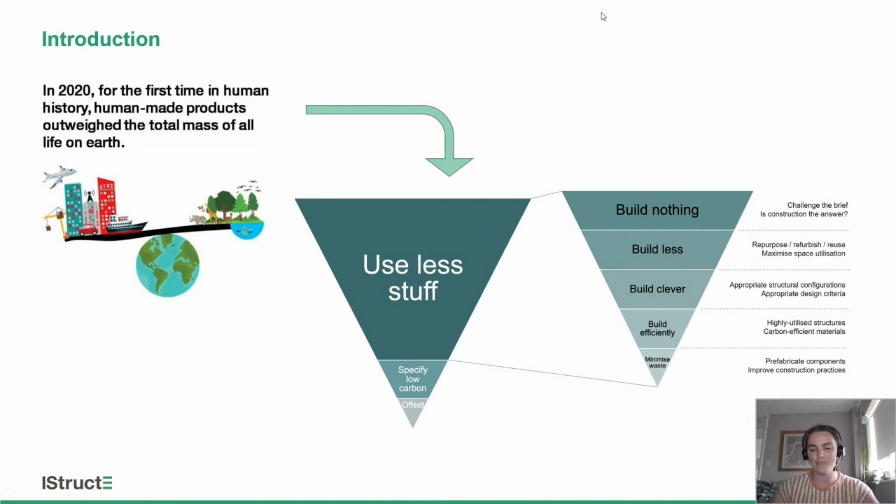Obviously, these triangles have been done to death so far over the presentations before us, which is great because it lets us move into the case studies quite quickly.

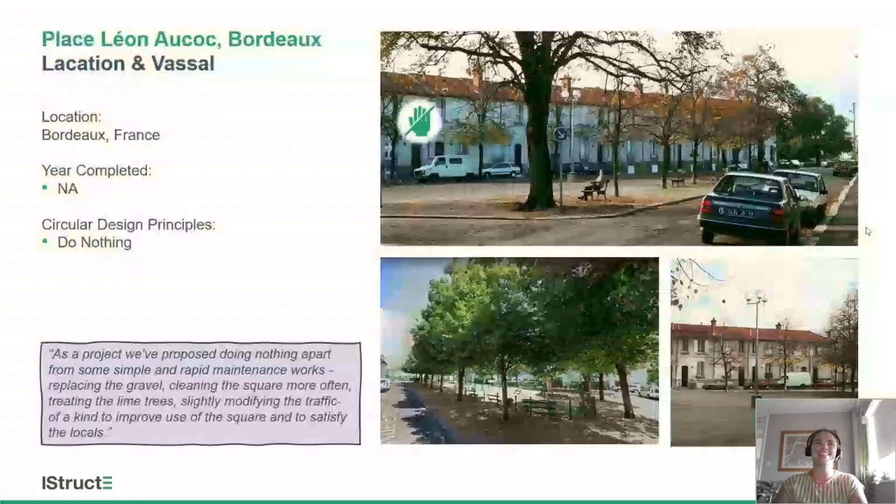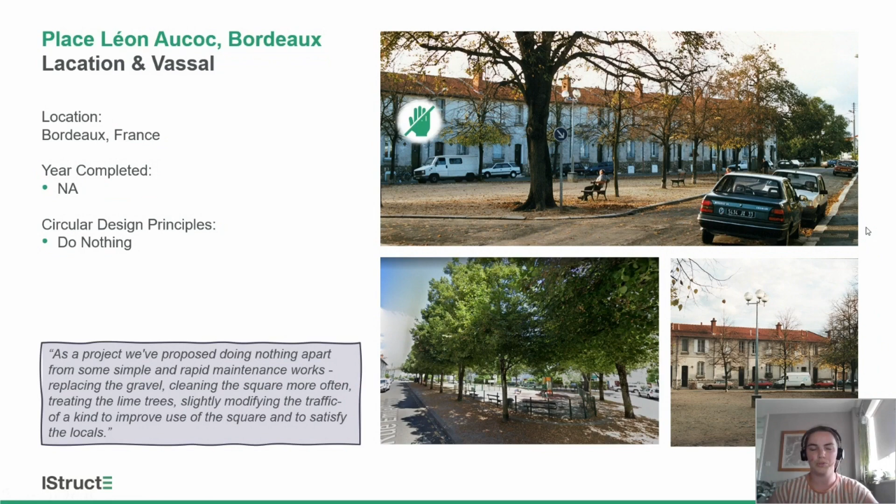No small task. And I thought I'd start with the very top of the pyramid: do nothing. Some of you might have heard of Lacaton Vassal, who won a very prestigious architectural prize recently because their principles as a practice are to do as little as possible. In this particular case, they did nothing. They were employed by the client to establish how to rejuvenate, change, or update this residential square in Bordeaux, France. They assessed it and said, this square is serving its purpose beautifully, it doesn't need any changes, please just maintain it nicely and you'll be grand. So a great example of questioning the brief and eventually not doing anything.

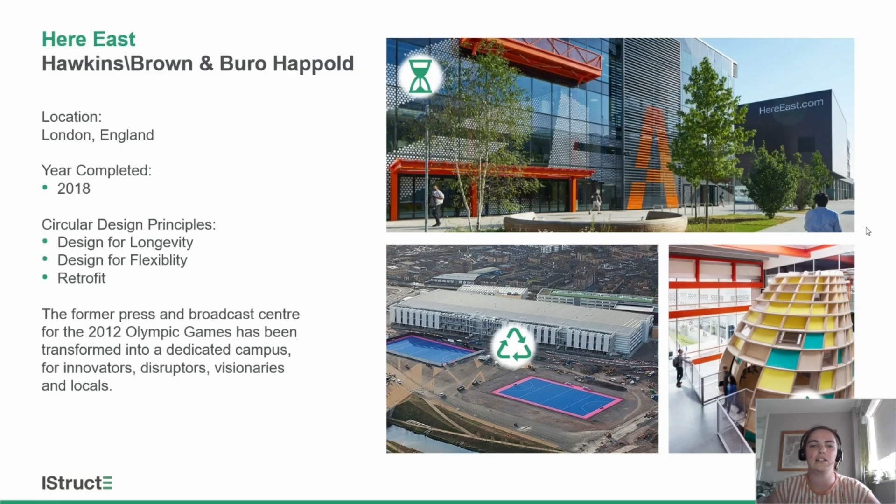Next, we have Here East, which most of you should be aware of from the 2012 Olympic Games held in London. This is one of the buildings constructed at that time to host the Games—you can see on the bottom left the former press and broadcast centre. This was adapted by Buro Happold and Hawkins Brown into a space for local businesses and innovators, designed as a very flexible, adaptable, and long-term space. They expect this building to be here as long as possible and to adapt to the needs of the community over time. It's also a retrofit of a building that was constructed, albeit quite a young one.

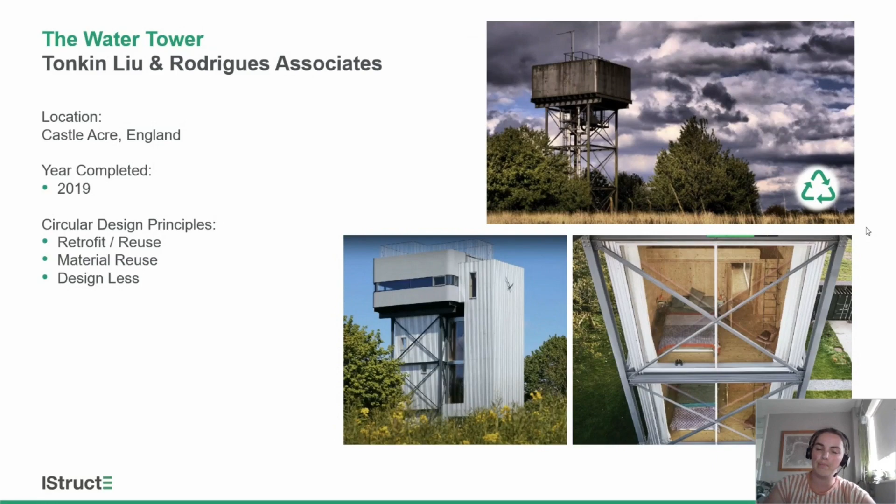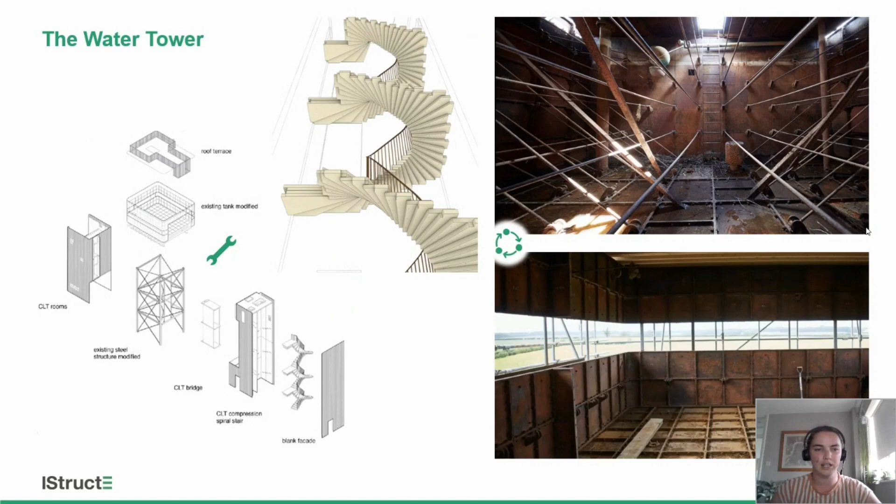Next, we have the Water Tower, a lovely project completed a few years ago in Norfolk. The client purchased the water tower shown in that top photo and converted it into residential use. The engineering and architectural teams did their utmost to use as much of the tower as efficiently as possible, add as little as necessary to convert it into a residential state, and use very low impact materials during construction. There's a cantilever timber staircase, which is very cool. They kept the water tower tank at the top, cut a slit in it, and got the window frames to act as moment frames to keep the shape stable, essentially trying to design all the elements as efficiently as humanly possible.

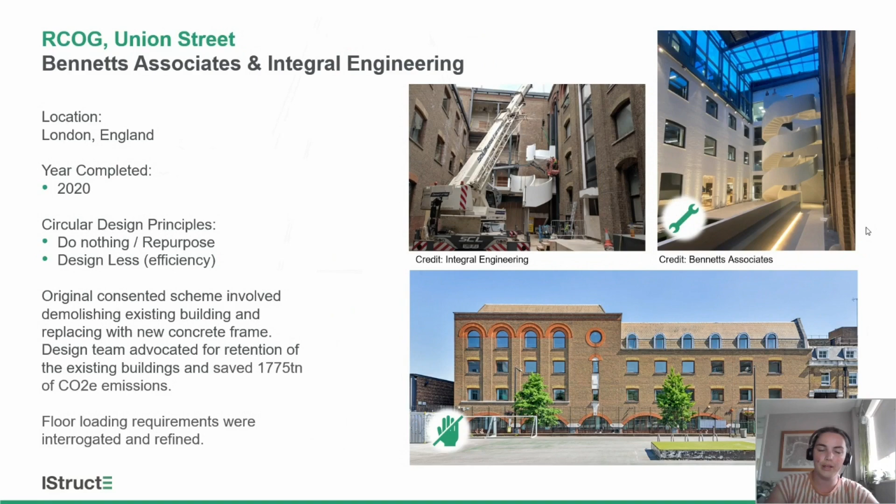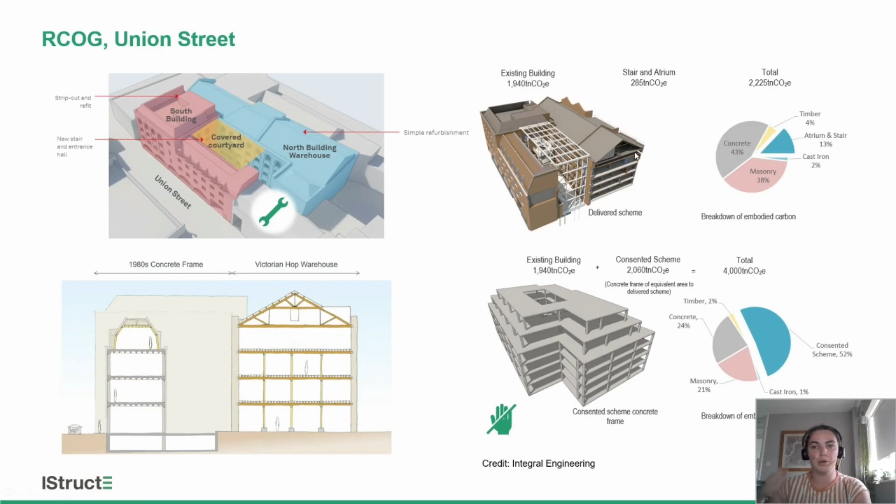And they also questioned the building control requirements for a live load of 5 kilonewtons per meter squared in the top of this building here, which was being converted into a sort of office meeting space. And they managed to get that requirement down to 4 kilonewtons per meter squared based on the fact that for fire escape reasons, you couldn't even put that many people up on that floor.

Next, we have Feldballe School, which is in Denmark. A really lovely project designed to be very flexible and adaptable. It can be deconstructed by hand, so it can be relocated elsewhere if necessary, or just so that elements can be repaired. And then the materials used throughout are sort of wooden cassettes with straw bale, compressed straw insulation.

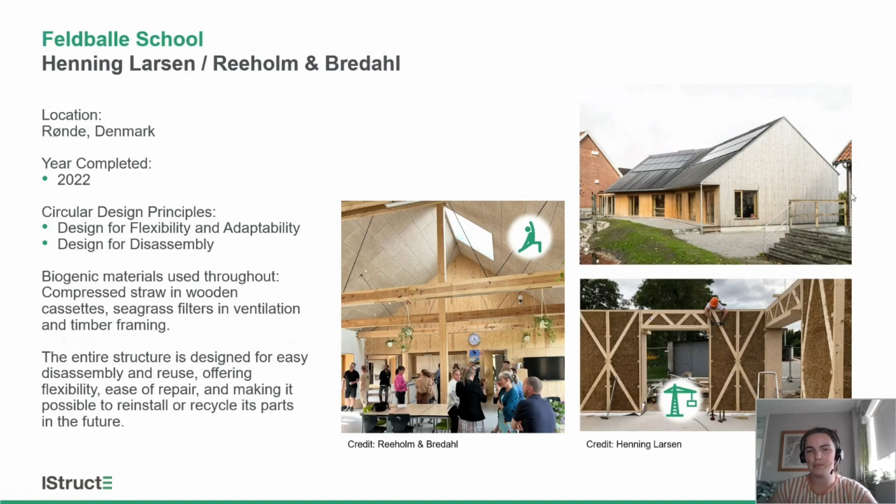They use seagrass in the filters, so the ventilation. And yeah, it's designed essentially for that sort of very flexible space as well, so it can be rearranged and adapted in the future if needed.

This is actually one of Civic Engineers' projects in London, 318 Oxford Street. Some of you might be aware of the sort of House of Fraser. It's a 1920s steel frame building in central London. And this is a great example of the collaboration that we've just been talking about and having these open conversations. So in this project, they're removing the top two floors of the building and building new 3 stories up.

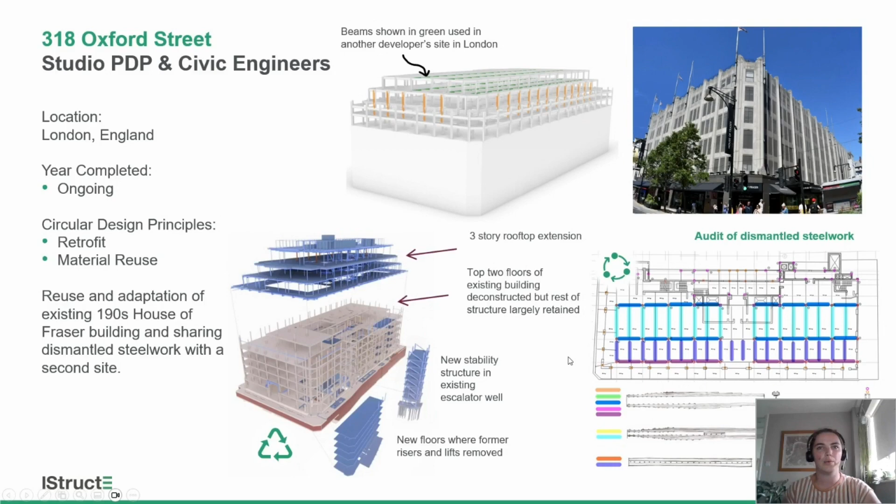And we've audited the steelwork that's in those upper floors that's being demolished, and where we could reuse it within the building ourselves, we have done that a little bit. 2.5 tons are being refabricated and reused in the existing building. But conversations were had with a completely different design team, completely different client on a project elsewhere in London, and 20 tons of steelwork have been bought by that project and relocated across London.

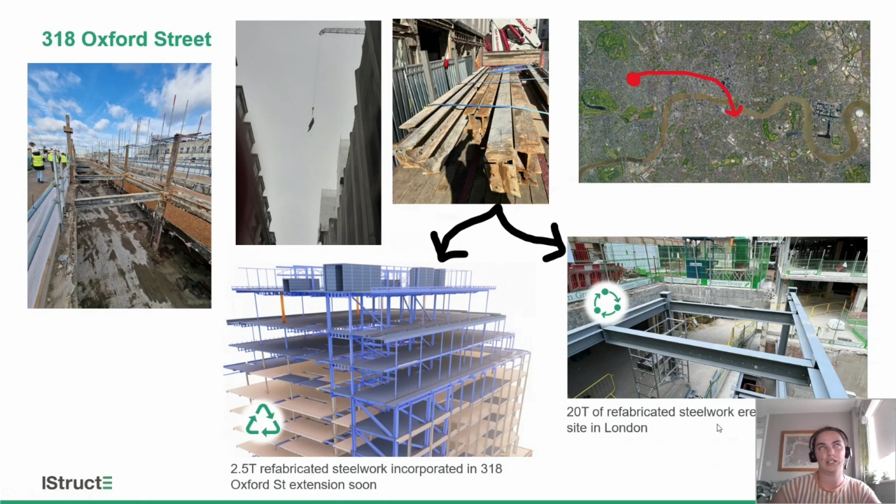And they weren't sent to a stockist and then bought separately by that project. That was had through open collaborative conversations between the clients and the engineers on the project, which is very exciting. It can be done. Also to point out that this is pre-1970s steel, and this was still justifiable.

Next, we have the ABBA Arena, which is in London for now. So some of you might have heard of this arena space, which is hosting the avatars, so a virtual ABBA concert. And this building has been designed to be fully deconstructable, adapts to any future locations where the tour might relocate to, and also designed very efficiently.

So according to Xylotek, who are the timber specialist engineers on the job, they revised the original scheme for the auditorium, increasing the amount of engineered wood and removing about 140 tons of steel, and thereby halving the carbon footprint of the design. So really interrogating what was needed.

Also, it's a really lightweight building. It currently rests on about 300 jack pads. So it's on a car park site, got jack pads on it and then the frame. And when the arena is eventually deconstructed, that car park will remain intact and be able to be reused. And the building could be dismantled and sent somewhere else and re-erected.

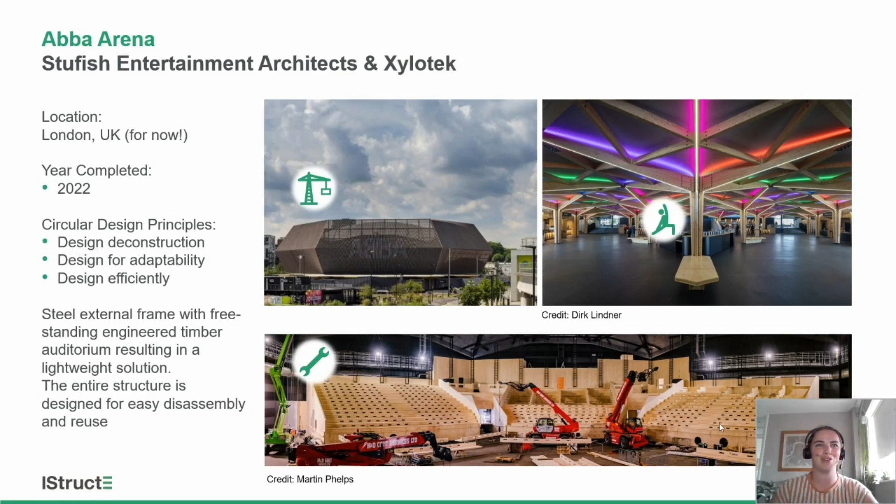And lastly, we have this really wonderful project in Switzerland, the Kopfbauhalle, which was completed a couple of years ago, where they tried to bake in, as proof of concept, as many circular economy principles as possible. So they salvaged most of the new frames. There's an existing building underneath, and then there's a new steel frame above. That new frame, the skeleton, was once a distribution center somewhere else in Switzerland for a shop, and that's been dismantled and brought to site and reused here and adapted.

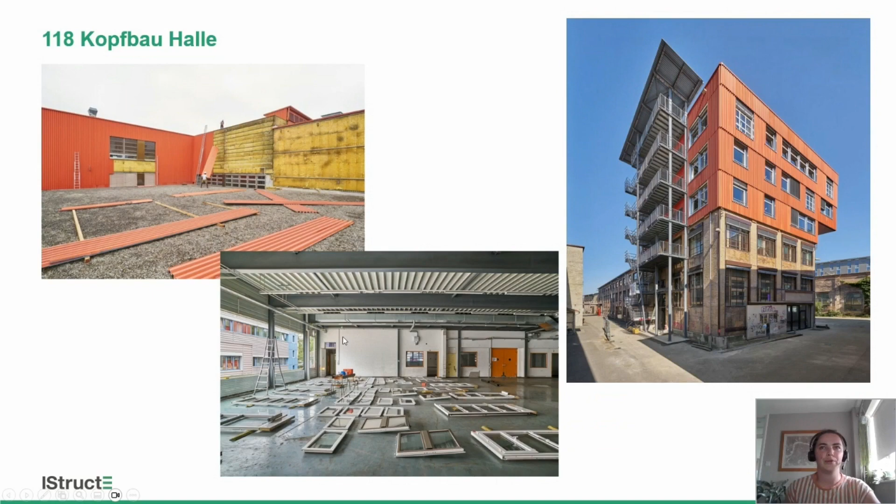There's also a staircase, which you can see in this photo over here, which was again taken from a different building. Then all the cladding and the windows were salvaged from an office building in Zurich, the Orion building, which was due to be dismantled, and they salvaged all of these items and reused them in their project.

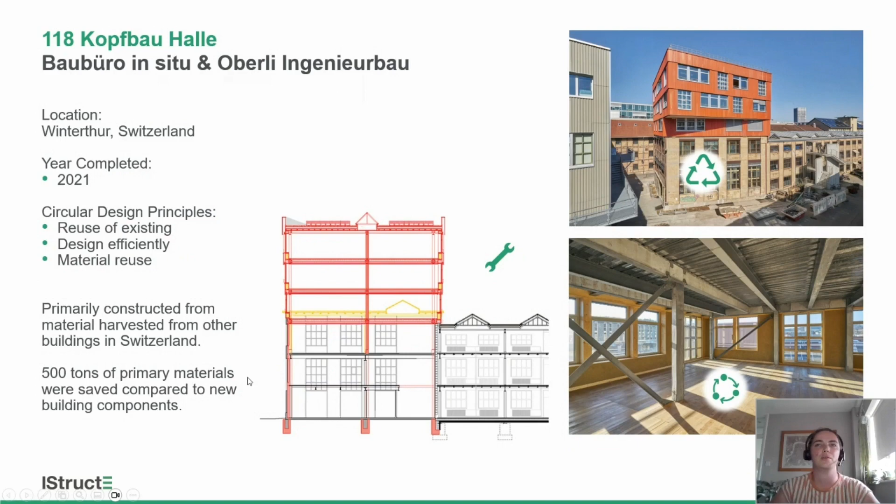And where they couldn't salvage materials and incorporate them, they tried to use as low impact materials as possible. So there's a lot of timber, straw insulation, and lime in the rest of the building. And they claim 500 tons of primary material were saved compared to if this had just been constructed out of new building components.

So I'm now going to hand you over to Sean, who's going to talk about some projects elsewhere in the world. I'm, as Claire said, going to focus on the rest of the world, primarily with a focus on North America, since that's obviously my familiarity, but we'll tour around a little bit. So running through.

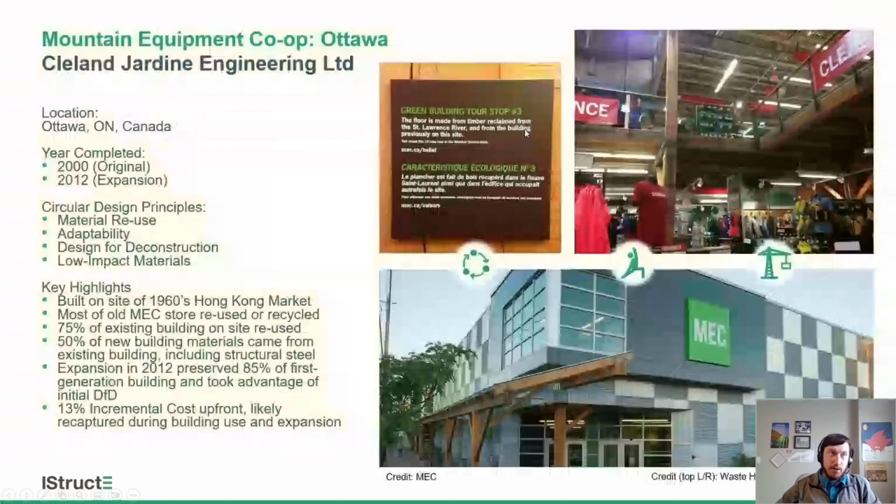So the first one is the MEC store in Ottawa, Canada. MEC is the big outdoor retailer across Canada. And in 2000, they wanted a new store in a different part of town in Ottawa. And there was actually a whole lot of reuse that happened here. There was an existing one-story Asian grocery on the site, and a lot of that got reused.

Actually, a good chunk of the structural steel got reused into the new store that was being built on the site. In addition, the old MEC store in a different part of town was mostly reused in other locations. And then the 2000 building was actually designed for flexibility and adaptability and disassembly. And in 2012, when they wanted to expand, they were actually able to do so and reuse 85% of the building.

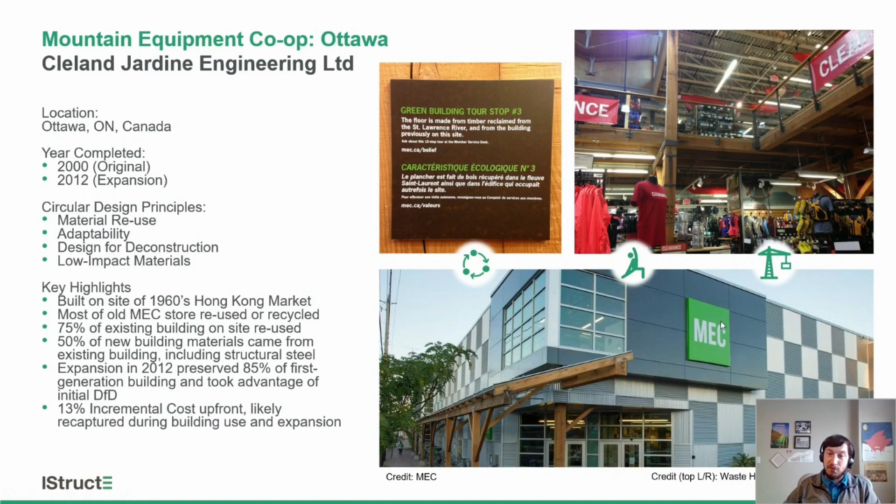There was an estimate here that the initial construction of this cost 13% more than a traditional building, but it was estimated that that was probably quickly recaptured, especially with the expansion having to do very little additional work.

The next one is the Quay Quarter Tower in Sydney. This is one that Arup was involved with. BG&E was the structural engineer, and this was the reuse and expansion of an existing tower. You can see on the upper left what the site was. The tower is in red, and on the right is what it became.

And there's a nice little graphic down there at the bottom indicating the demolition in the red, and then the structure that was maintained, and the expansion in the green, which about doubled the floor area. They were able to maintain about 2/3 of the existing structure and eliminate about 12,000 tons of carbon emissions relative to had this been torn down and built new.

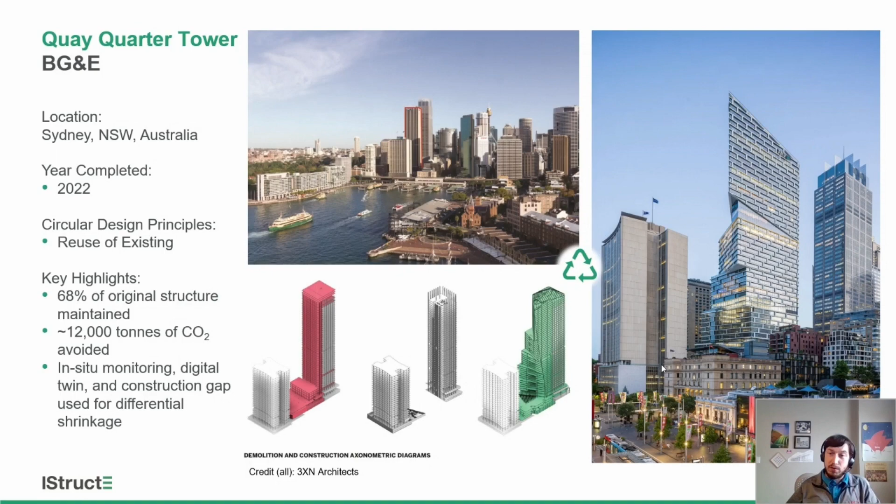And in addition, there was also a lot of technical effort that went into monitoring differential shrinkage when adding the new concrete onto an existing concrete tower. And very quickly, there's a nice time lapse here that is worth seeing of how this all went up. And so you can see the scaffolding and taking down all the structure that couldn't be reused, leaving most of that core intact, and then rebuilding that new floor plate around it. And there we go.

And then moving on next in the Middle East, in Qatar for the World Cup, Stadium 974, which was one of the host venues. This was done by Schlaich Bergermann out of Germany. And they actually designed this to be demountable and able to be reassembled in another location, either in the current iteration of the stadium as it is, or in smaller multiple stadia. And 974 is named for the number of shipping containers that were used, as you can see here, for a lot of the vending modules and stairways and such.

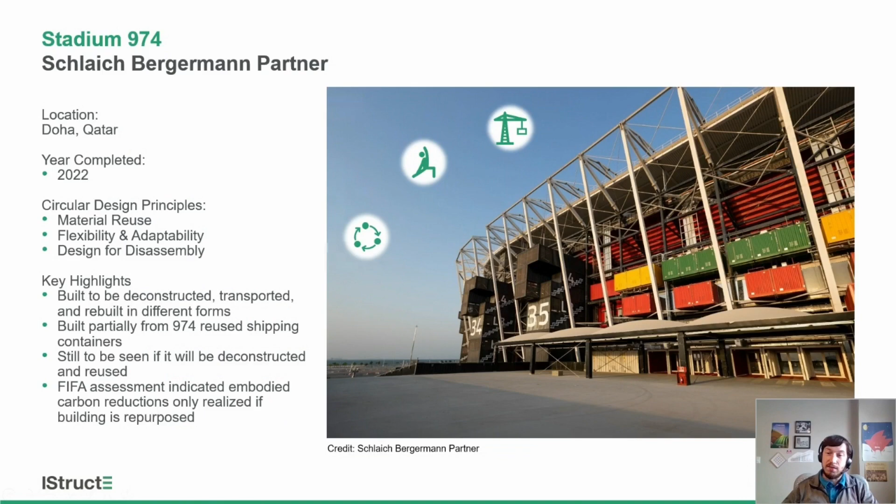There were some studies done on this that indicated that it's only really going to be a carbon benefit if this does in fact get reused on another site, especially now that the World Cup has happened. And so that's something that'll be interesting to keep an eye on, if this really does get used for its intended design purpose.

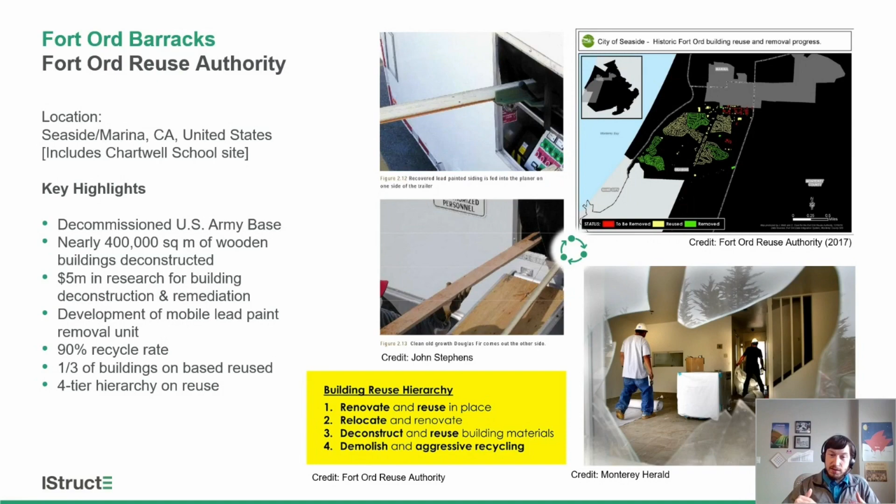And one of the great things that came out of this was they developed this mobile lead paint removal trailer. Where, as you can see in the upper left, boards went in with contaminated lead paint on them. They got chipped off, and all that dust was contained in the trailer. And then out the other side, you get these nice clean boards that are able to be resold and reused. And they also developed this 4-tier hierarchy on reuse, which you can see here. So what was their first priority, and then going down, and finally, recycling is the last option if nothing else was possible.

And then jumping to Africa, this one was the Rwanda Institute for Conservation Agriculture, which is a large new campus development there, just finished in the last couple of years. And this is to teach Rwandan students about conservation agriculture so that they can be the future of land management in the country and help manage the land in a more sustainable way. This focused less on those hard definitions of circular economy that were in those older slides, but more on natural materials, biodegradable materials, and such.

But there were also some other key ideas in here too of designing for flexibility and adaptability. A lot of the buildings were done on regular, like 4-meter by 8-meter grids, which allowed for repurposing down the road if needed. A lot of the trusses were standardized so that if one needed to be replaced, it was easier to be replaced, or if they need to be reused somewhere else, it was easy to do that. And a lot of the benefit there was also ease of construction, ease of labor training. And so there wasn't this huge learning curve for the workers to be able to install it, and it was a lot quicker to get up to speed. And again, a lot of mechanical connections for easy demountability. And finishes were minimized as well to keep the material down to a minimum.

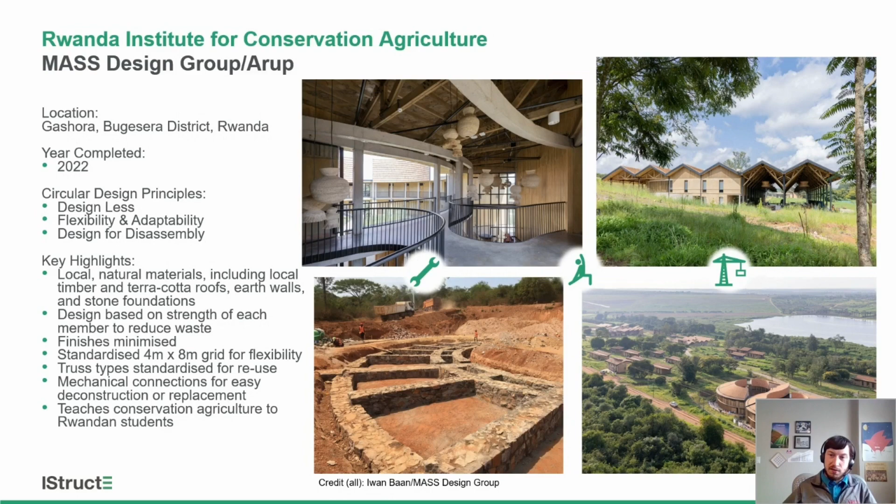And again, a lot of earth-based materials, stone for the foundations, which you can see there, terracotta and timber for the roofs, earth for the walls. One lesson that was learned here is some of these products did need treatments that make them not necessarily biodegradable. Maybe the timber, making it either weatherproof or pestproof or whatever. And so that's an area of research that's needed with some of these materials, is how to get that performance out without these extra processes that make them harder to go back to the earth at end of life.

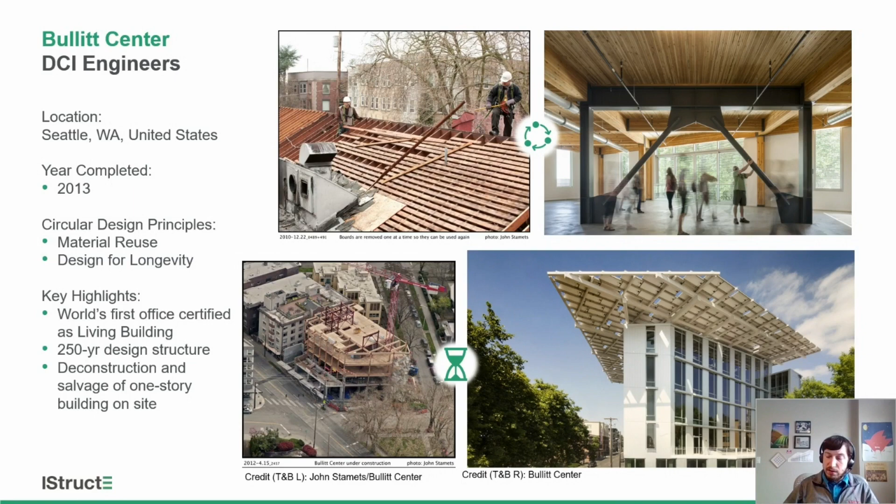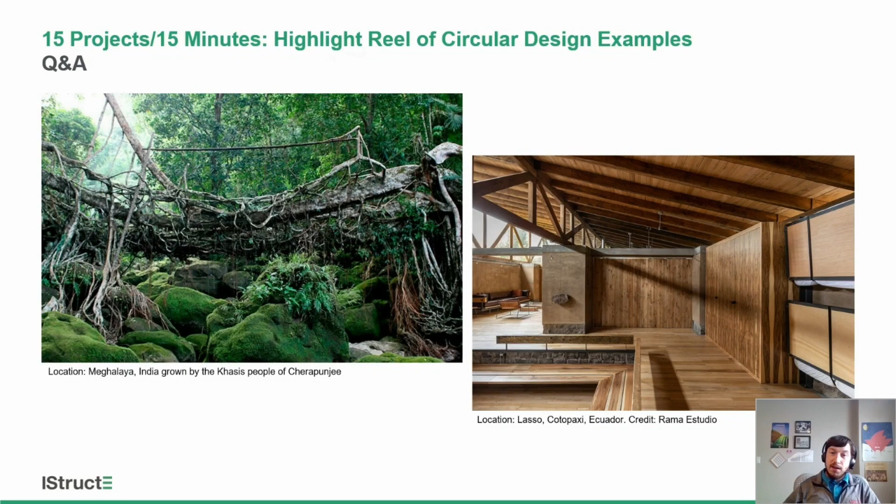And one thing we wanted to note is that we touched on a lot of great projects here. We hit a lot of different parts of the world, but there's a whole lot of great work out there that we were not able to touch on. And in particular, in developing nations, there's been a lot of circular design work that may not necessarily be in fancy design literature today, but has been going on for a long time. And so we just wanted to highlight some of those. We can see a traditional bridge in India on the left, and a more modern architecture home design in Ecuador on the right. And so we just wanted to highlight how much great work is out there beyond what we can get to today.